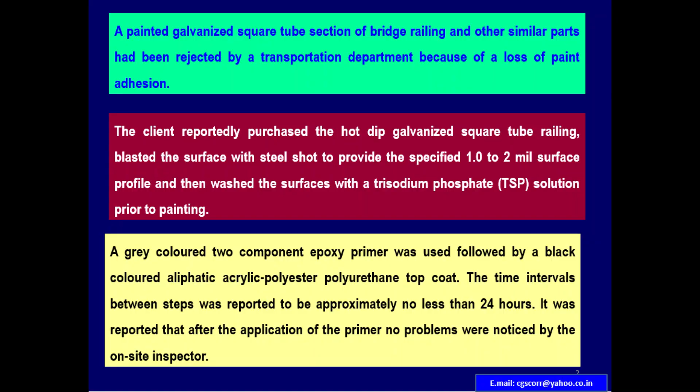A grey colored 2-component epoxy primer was used, followed by a black colored aliphatic acrylic-polyester polyurethane top coat. The time intervals between steps was reported to be no less than approximately 24 hours. It was reported that after the application of the primer, no problems were noticed by the on-site inspector. After the application of the top coat, some blistering was observed.

Observed blisters were repaired by locally removing the paint down to the galvanized surface, spot repriming and top coating. No further loss of adhesion had been observed at the repair locations. Other blisters occurred after being shipped and stored at the job site. It was also reported that post beams painted at the same time have not experienced any evidence of poor adhesion.

At a later date, a second rail section was submitted that had been repair coated in his shop, as well as a large paint chip that had been sent from the job site. The rail section exhibited few areas of paint loss due to poor adhesion. The loss of adhesion occurred at the galvanizing primer interface. The areas were usually observed near the ends of the rail section, with the exception of one area near the center of the rail section, where the loss of adhesion occurred at the location of an intentional X-cross cut.

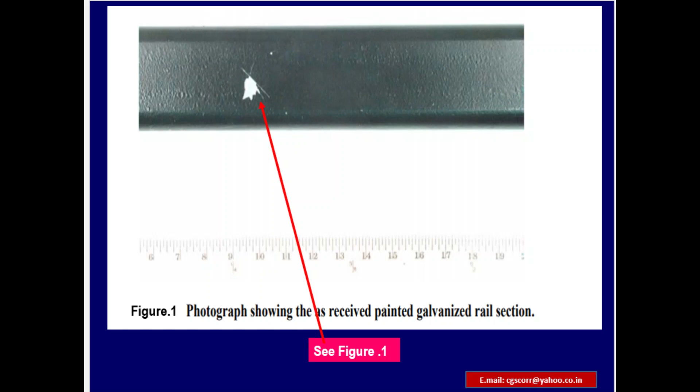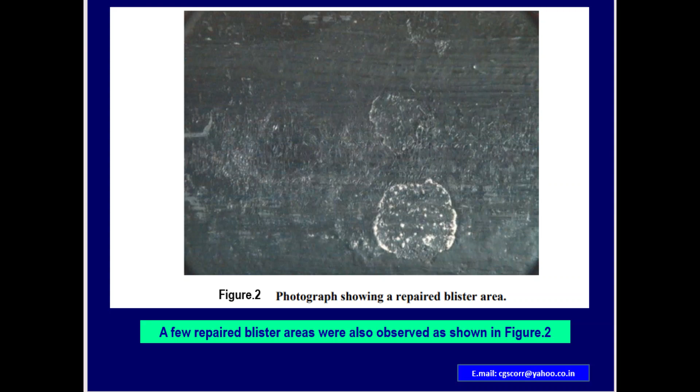Figure 1 shows the photograph of the as-received painted galvanized rail section. You can see the red pointer showing the intentional X-cross cut. Figure 2 shows a repaired blister area. A few repaired blister areas were also observed in this picture. No blisters were observed in the as-received sample.

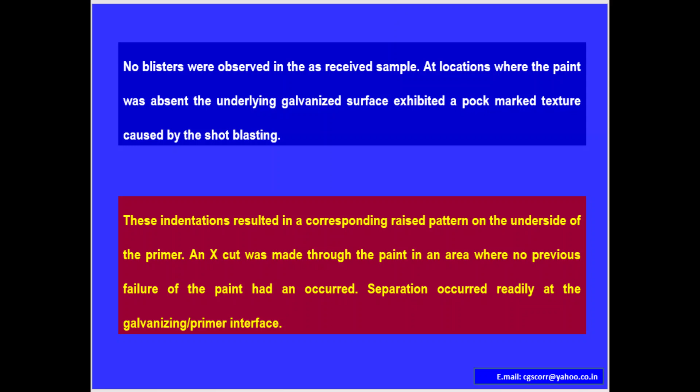At locations where the paint was absent, the underlying galvanized surface exhibited a pock-marked texture caused by shot blasting. These indentations resulted in a corresponding raised pattern on the underside of the primer. An X-cut was made through the paint in an area where no previous failure of the paint had occurred. Separation occurred readily at the galvanizing primer interface. Figure 3, 10 times magnified, showing particulate material on the primer underside. On the underside of the paint film, considerable particulate material was observed, as shown in figure 3.

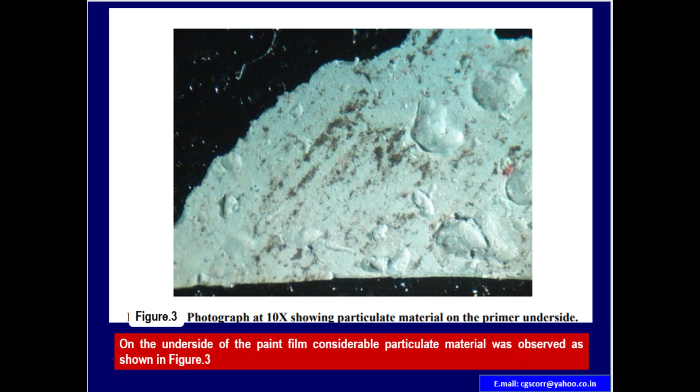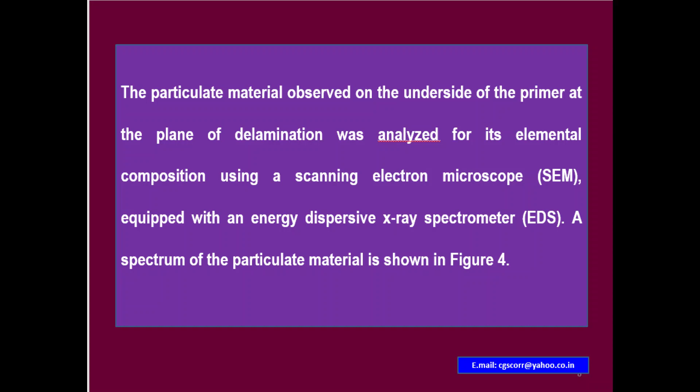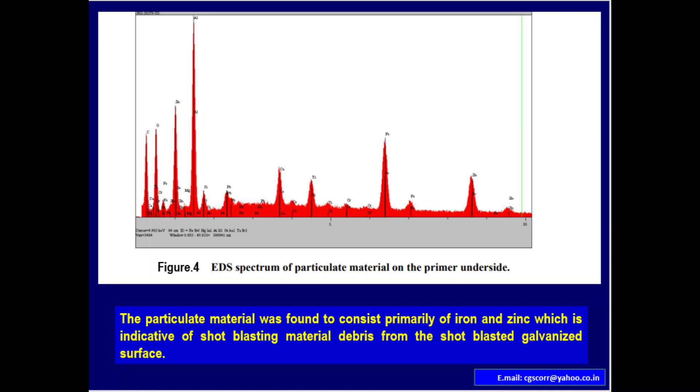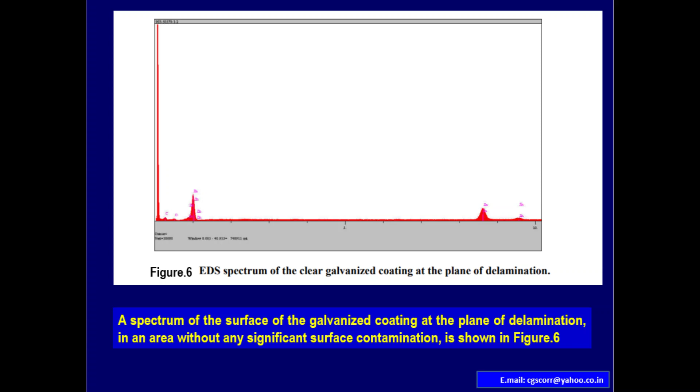Figure 6 depicts the EDS spectrum of the clear galvanized coating at the plane of delamination. A spectrum of the surface of the galvanized coating at the plane of delamination in an area without any significant surface contamination has been shown in figure 6. You can see the peaks of carbon, oxygen, zinc, etc. No chromium indicative of a chromate conversion coating was detected on either mating surface.

Also, the surface of the galvanized coating at the plane of delamination was further examined by Auger electron spectroscopy, which is a surface sensitive method of elemental analysis. Again, no chromium was detected. A spectrum of the primer plane of delamination could not be obtained. Transverse cross sections through the painted galvanized rail were prepared for subsequent metallographic examination.

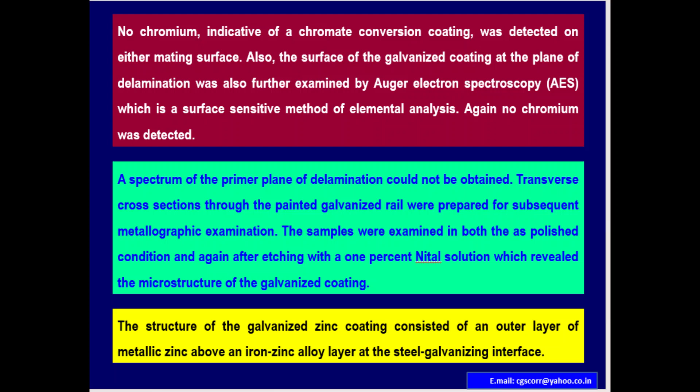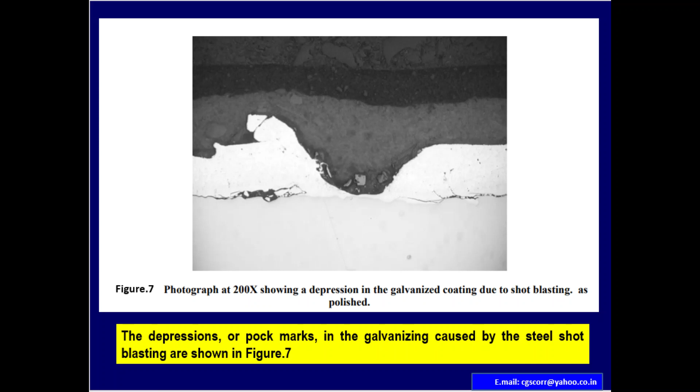The samples were examined in both the as polished condition and again after etching with a 1% nital solution, which revealed the microstructure of the galvanized coating. The structure of the galvanized zinc coating consists of an outer layer of metallic zinc above an iron zinc alloy layer at the steel galvanizing interface. Figure 7. Photograph at about 200 magnification, showing a depression in the galvanized coating due to shot blasting, as polished. The depressions, or pock marks in the galvanizing caused by steel shot blasting, are shown in figure 7.

The coating thickness was measured optically using a calibrated filar eyepiece micrometer. The average thickness of the primer was measured to be 0.0041 inches, that is 4.1 mils. The average thickness of the top coat was measured to be 0.0031 inches, that is 3.1 mils. These values do conform to the specified minimum intermediate, that is primer, and finish coat dry film thickness DFT values of 3 mils as per paragraph 70806.1.1 of the New Hampshire Department of Transportation GAV Paint Specification Amendment to Section 708 Paints.

The paint was found to have very poor adhesion at all locations examined, with the plane of delamination occurring at the primer galvanized coating interface. Considerable debris from the shot blasting operation was observed at the plane of delamination, which exhibited a greater tendency to adhere to the underside of the primer. No chromium indicative of a chromate conversion coating was detected on the clean mating primer and galvanized surfaces. The only chromium detected was found to be associated with the iron blasting shot, suggesting that the iron shot contains chromium as an alloying element.

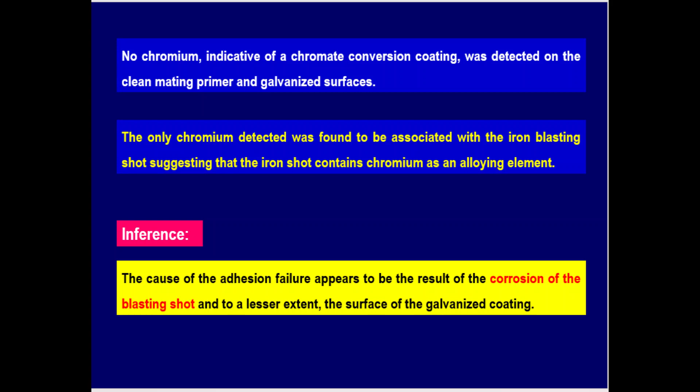Inference: the cause of the adhesion failure appears to be the result of corrosion of the blasting shot and, to a lesser extent, the surface of the galvanized coating.